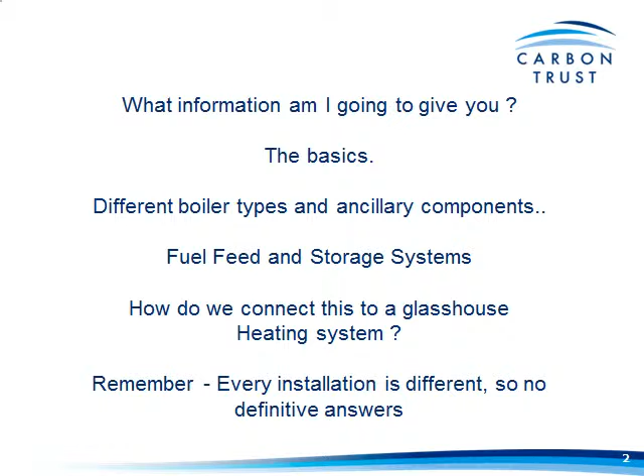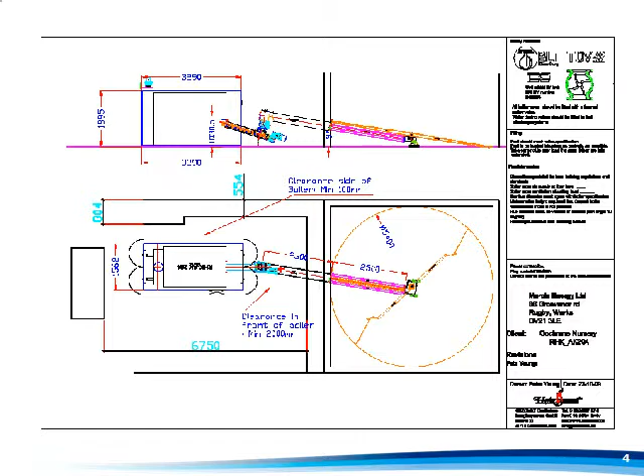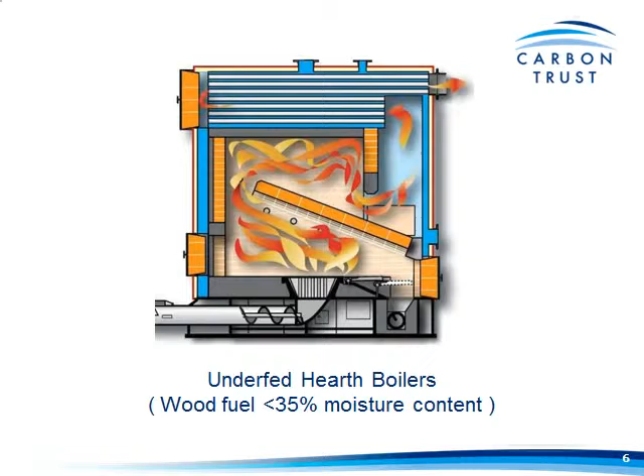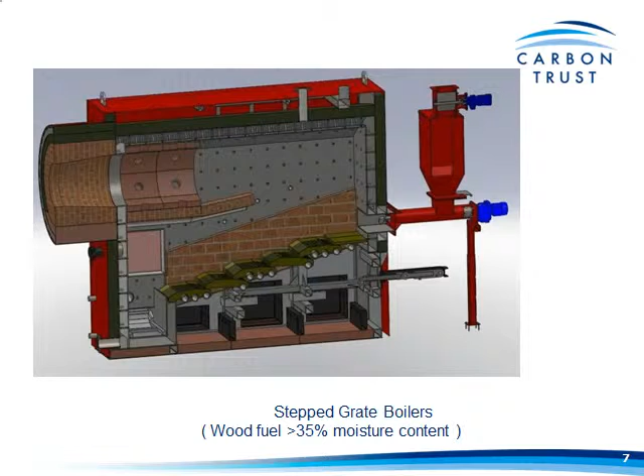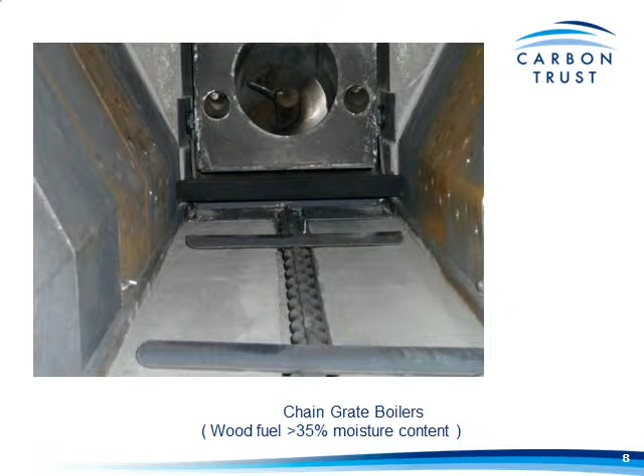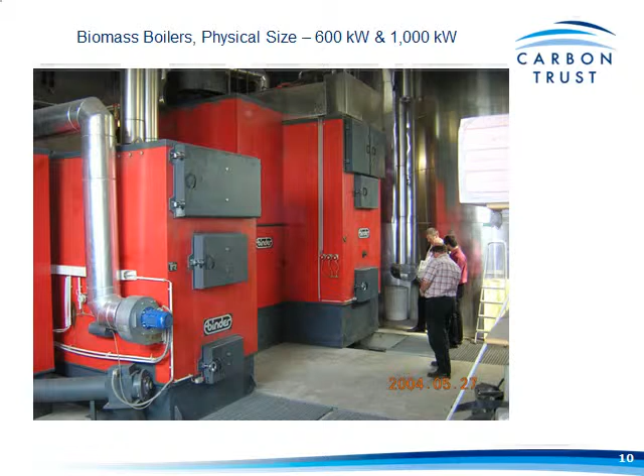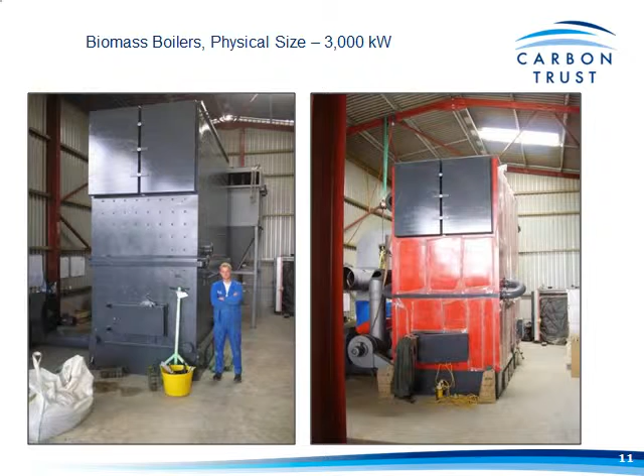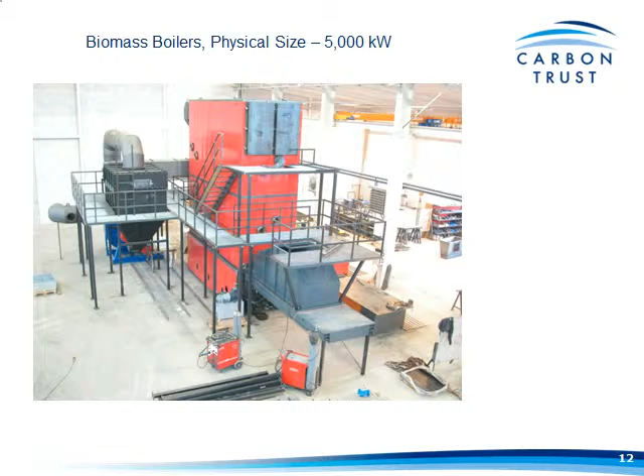We'll get back to the 600 kilowatt boiler, we can get it into probably what is a normal size boiler house. We're talking about a 6 megawatt boiler, you're talking about probably a new build plant room there.

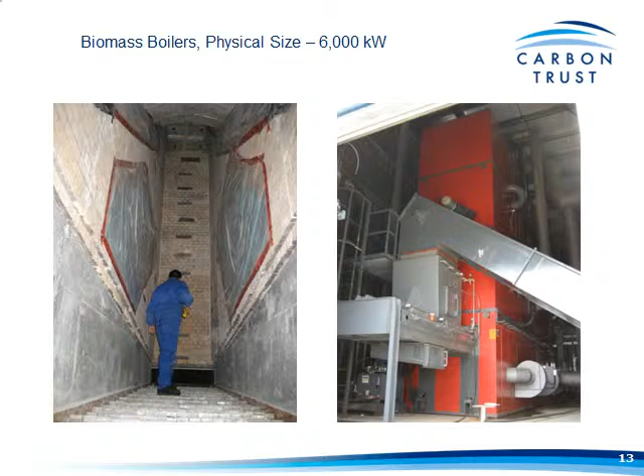Just going back to what I was discussing earlier about the heat exchangers. So generally, if I pop us back to that one very briefly, on that 5 megawatt boiler there, we have the combustion chamber at the bottom, and we have the heat exchanger body, the boiler tubes, in this top part here. So one on top of the other. Something like that will be delivered to site in 2 halves, put one on top of the other.

That's the alternative. Some manufacturers, what you'll get is your combustion chamber here, and your actual heat exchanger body is sat in front of it. Here we're looking at large scale plants, we're talking 3 megawatt and upwards, but again the actual floor space itself is much bigger on something like that.

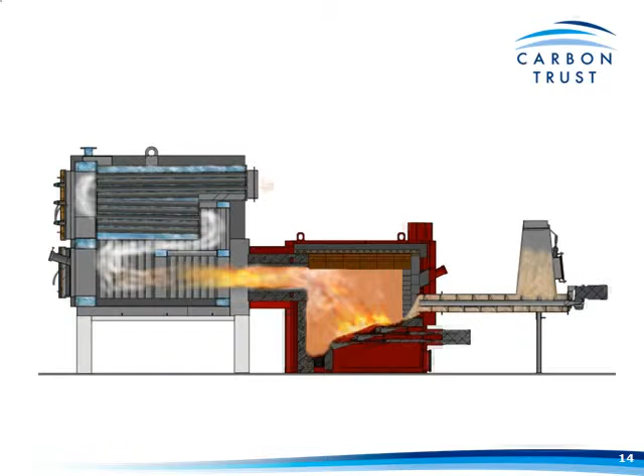Boiler selection has got to be based on fuel. We're looking at fuel first before we look at boiler choice.

The concept of a boiler that burns different fuels is largely a myth. We can possibly swap between the likes of wood chip and wood pellet, but you're recommissioning the boiler to do it. If you're looking for something that will burn wood and it'll burn straw, we're into very difficult territory indeed, without some major changes in between. So it's not a case of doing so many months of one fuel and swapping over. What you're looking at is a constant fuel supply all the way through.

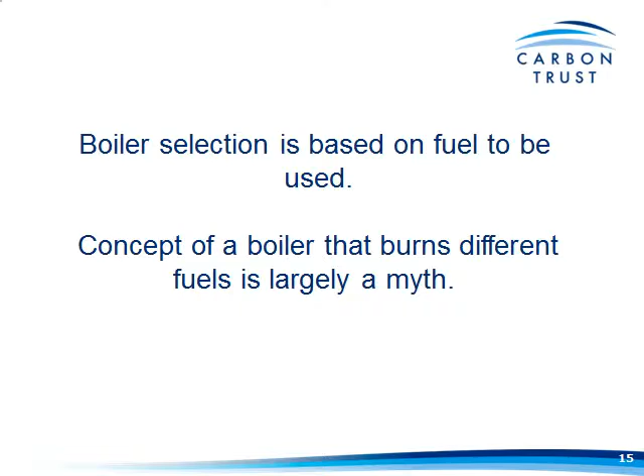Boiler features, the optional extras. What we're often asked is, how much maintenance is this going to take? How many hours a day is it going to take to look after this boiler? There's certain ancillaries on the boilers that are almost must-haves, and with those features on the boiler, it makes your maintenance an awful lot easier.

So just the basics of these, what I'm going to run through is flue gas cyclones, which take the fly ash out of the flue gas, automatic tube cleaning, automatic de-ashing, and automatic ignition. All of which are fairly hands-on procedures if you've not got them, so really going between the difference of what is daily maintenance to probably weekly maintenance.

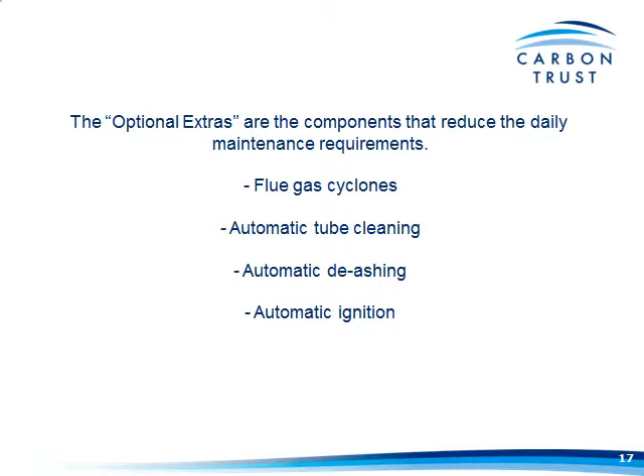Your flue gas cyclones - basically your flue gas is brought in through here, flue gas drops, and it is acting like a cyclone, spinning the flue gas. And what that's doing is it's then dropping the fly ash out of the gas and collecting it into a bucket at the bottom.

So these are similar to these units here. This is actually a school project where the flue gas is coming through. This is your cyclone body, and this is your ash collection bucket on the bottom.

We put a 500 kilowatt boiler in at Lanoyce Nurseries down in Cornwall. Now he's collecting half a bucket a day in that. But what we're actually seeing because of that, when it comes to end of the season and you're looking at glass cleaning, there's very little, if anything, on the glass house roofs or in the gutters or anything. That's taking out all that fine ash that without that unit on there would probably end up on the likes of your glass house roof or on the neighbour's windows or something like that. Not a vastly costly option, but something certainly worth having on the units.

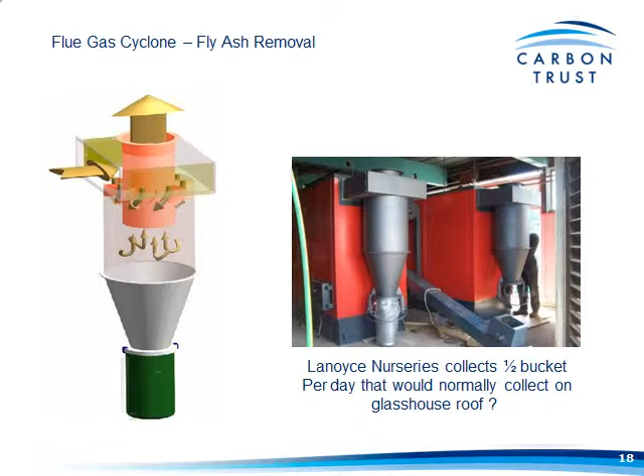Automatic tube cleaning. Obviously, with it being a solid fuel boiler, as the gases are running through the tubes, the soot's collecting on the inside of the tubes. So again, we need some sort of automatic cleaning system in there. Otherwise, what we're doing is we're opening the front door and manually cleaning the tubes out.

A couple of different types. Here we have an installation we did up in Wiltshire. It's for a district heating scheme.

This is air shock cleaning, run off a compressor. Each one of these units on the front is a jet. They're all timed, so individually they will go off and put a blast of high pressure air through the tubes, blowing the soot into the ash collection boxes at the back of the boiler. Very effective. The only thing I'd say is each one of those going off is almost like a shotgun going off.

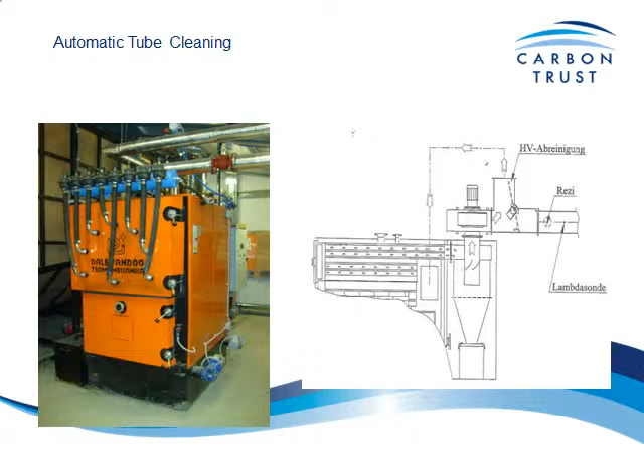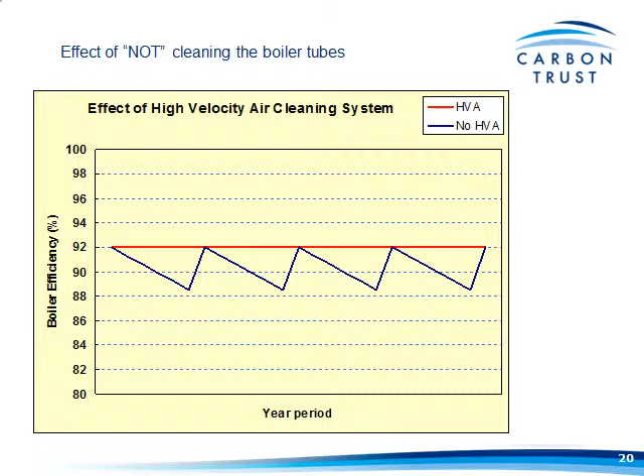In effect, what we're left with in here is potash. You can also, depending on how big your boiler is, put that on your garden.

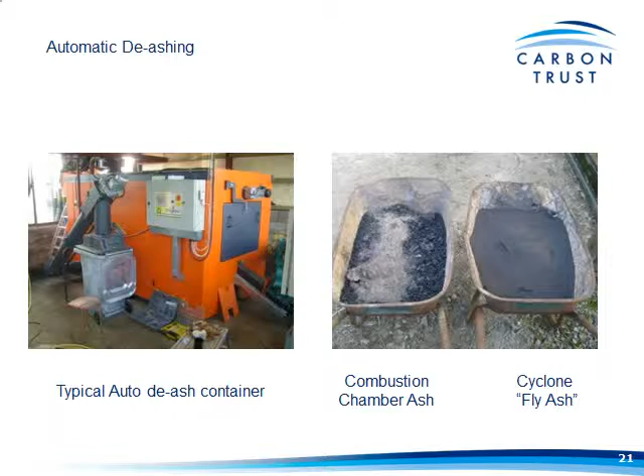Automatic ignition - generally these are heat guns, electric heat guns, and that's just heating the fuel up to a point where it will ignite. Again, if we've not got this, you're opening the boiler door, putting in fire lighters, and doing a manual light on the boiler. If the boiler's sized correctly, chances are you're probably only doing that at the beginning of the season, and it'll run all the way through, because we're trying to keep that boiler running - if it does shut down, it will smoulder for a period of time, and when your demand's back, it will fire up. But if it's left too long and it does go out, you're back onto a manual relight. So again, it's an option worth having.

There are some units where this can be an oil or gas burner that's actually fitted into the unit. I've seen units where they're sized to the capacity of the boiler - you lose some efficiency doing it, but it's sized to the capacity of the boiler, so you're actually putting yourself a backup burner in there. If there is a fuel issue, you can actually run that boiler on oil or gas. Not a cheap option, but it's there as backup if you need it.

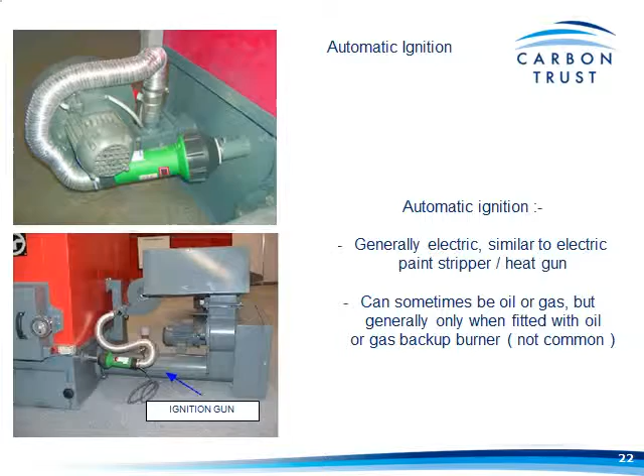Let's quickly touch on ceramic filters. There's a possible scenario within the renewable heat incentive that could focus on emissions.

So we've got to counteract this. What we're hearing is that it's probably largely focused on NOx emissions. With flue gas cyclones, they're not doing an awful lot for NOx, but we are taking out the fine particles.

Exhaust gas recirculation is where they actually bring exhaust gas back through the combustion chamber to control the combustion temperature. In doing that, it actually lowers your NOx emissions.

But we'd like to think that is going to be sufficient to meet the NOx regulations of RHI, if that's what's coming. If they don't, what we've got to look at are filtration units. A possible example of that is ceramic filter units, where we have ceramic tubes in housing behind the boiler. There is a cost to that, but until the RHI is known, it's a difficult one to predict. At the moment, when we're looking at costs, we've kind of got to allow a sum of money to cover that.

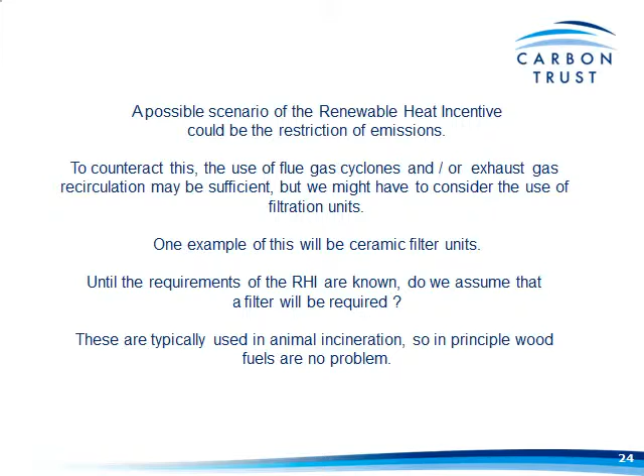Fuel storage options - that's what we're trying to achieve. When you get your wood chip delivered to site, ideally we want to be tipping straight into your fuel store. To build a hole in the ground can prove quite expensive. If your site's got a natural slope to it, you can possibly utilise that, or we'll possibly look at building some sort of ramp up to a fuel store, so you can deliver into it.

It may well be, on the quantities we're looking at, you're actually delivering your wood chip into a separate store anyway - just delivering it onto a barn floor, possibly using a front loading bucket to bring it to your main fuel store. So it's not really an issue if we're looking at those kind of quantities.

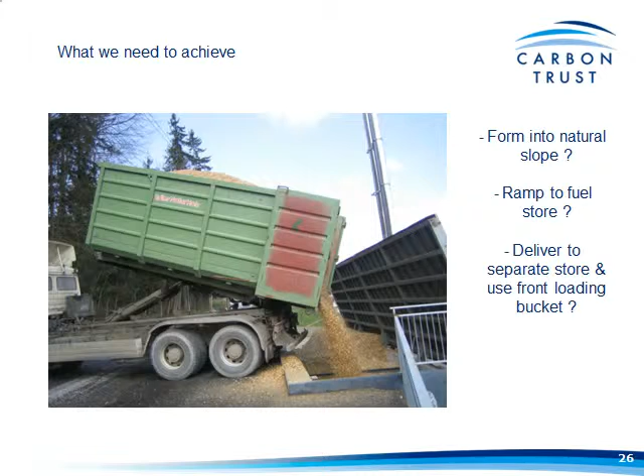Smaller boilers, if we're looking at boilers of probably up to 500 kilowatts, we can look at rotary agitators. Here we have a square bunker with a sweep arm in there. That arm sweeps around, bringing the fuel into this auger, which then passes into the boiler.

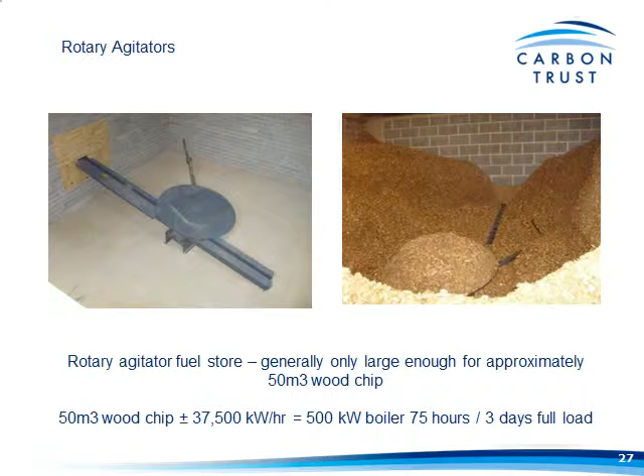Roundabout in those stores, you'll get roundabout 50 cubic meters of wood chip - 50 cubic meters, 37,500 kilowatt hours or thereabouts, depending on moisture content. So on your 500 kilowatt boiler, that'll give you 75 hours, around about 3 days at full load capacity with that boiler running flat out. So what I'm trying to get to is that kind of fuel store, you're really reaching your limit at around about 500 to 600 kilowatts - that is kind of your limit.

After that, we're really looking towards walking floors. Walking floors are basically a metal grate on the floor, controlled by a hydraulic ram. These grates will actually slide, pulling the fuel up the fuel store into what is an auger that runs across the back of the store. Now we can line these up side by side.

These grates can go 10, 11 metres long, probably at a maximum. What we can do is repeat that side by side, one on another, and with that you're delivering onto a flat floor.

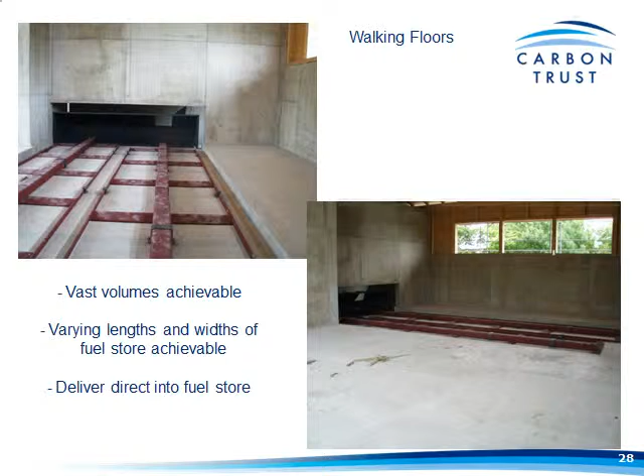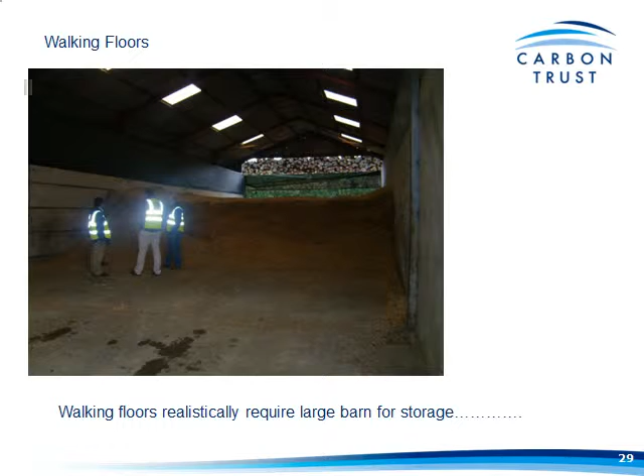So that's realistically what we're probably looking at - a barn with the walking floor built into the floor where the wood chip is piled on top. What we've got to consider is it's got to be high enough, because if you're coming in with large tippers, you need the height in there to be able to get it tipped on.

Some of these walking floors you can't drive on, some of them you can. Some of them, if you've got 4 inches of wood chip on top of the walking floor, you'll be able to drive a front loading bucket on there. Again, there's different units on the market - different manufacturers will offer different systems, so we should be a little bit careful about what these walking floors will actually handle.

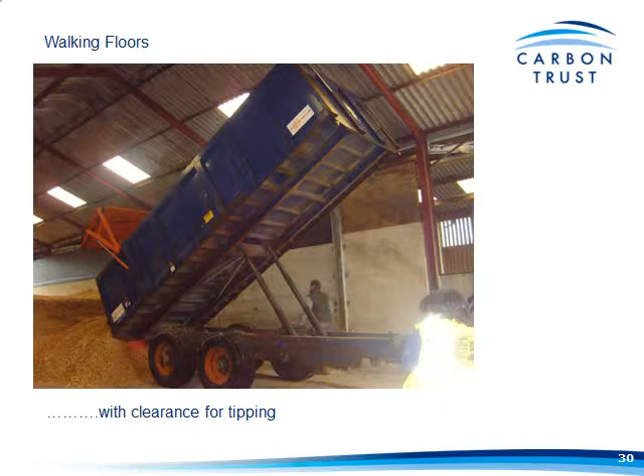Again, another option - I'm not going to go into the technicalities of it, but it is another option there based on your fuel choice.

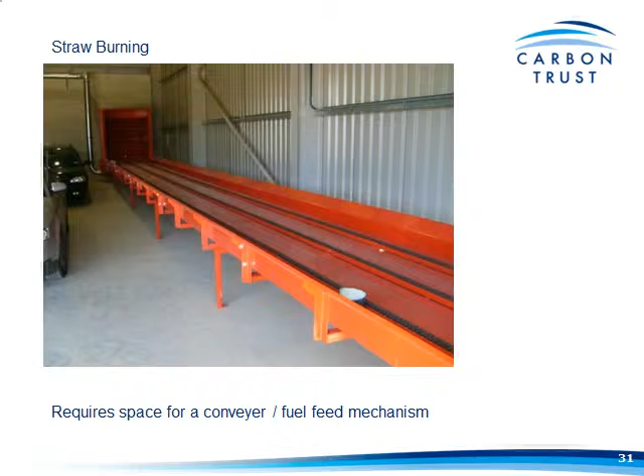Straw burning again - what we've got is this conveyor here running up, with an overhead crane unit taking the bales in. That one is actually chopping the bales rather than shredding them, chopping bales to then take the straw into the boiler with a hydraulic ram feed.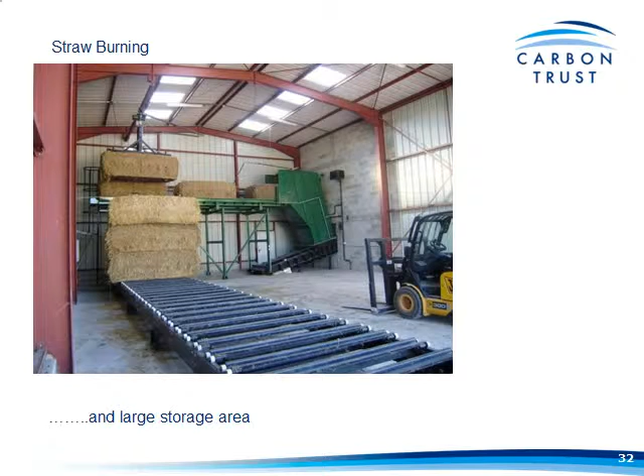But again, what we've got to look at is this vast area that you do need for fuel storage.

A few issues with straw burning: high sulfur contents, high chlorine contents. In the early days, the rule of thumb was your straw burning boiler will last 25 to 30% shorter time than your wood chip boiler would. These days they're starting to change the materials, and they're now very comparable to the likes of a biomass boiler, a wood chip or wood pellet boiler.

I guess we haven't got any actual data yet, it's so new there aren't any boilers that have got that sort of age on them. If we're looking at straw boilers, last week we looked at one, and that boiler is probably 4 years old, probably one of the older straw burning units in the UK. I think there's quite a bit of experience in incineration of waste to say that those steels do last, they burn some pretty noxious substances, so there is quite a history about that. I don't think there's any issue about the new steel in the boiler.

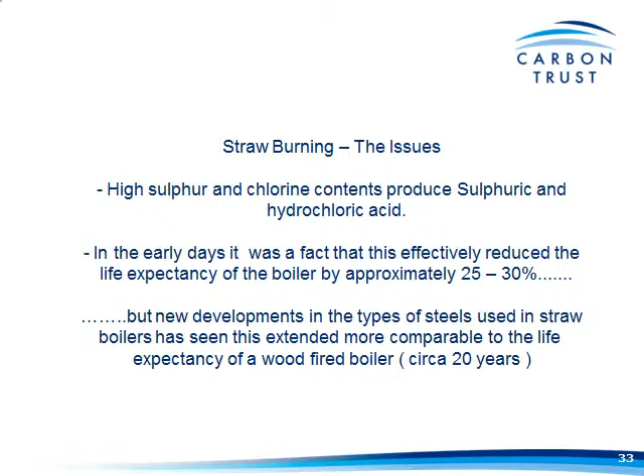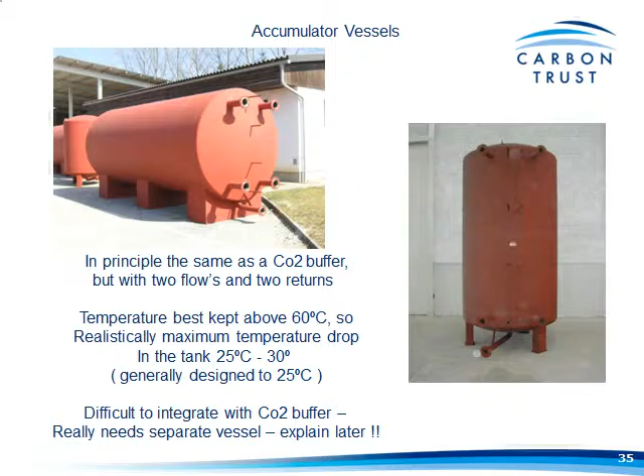Heat storage, Tim touched on this earlier. Your heat storage is a similar principle to your CO2 heat storage. The difference is that we're running these tanks with two flows, two returns on them, which I'll come back onto shortly. What we're looking at is trying to keep these temperatures above 60 degrees. Realistically what we're looking at is using 25 to 30 degrees out of that tank, so we're not dropping vast quantities like with CO2 heat storage, but we can link this in with your storage.

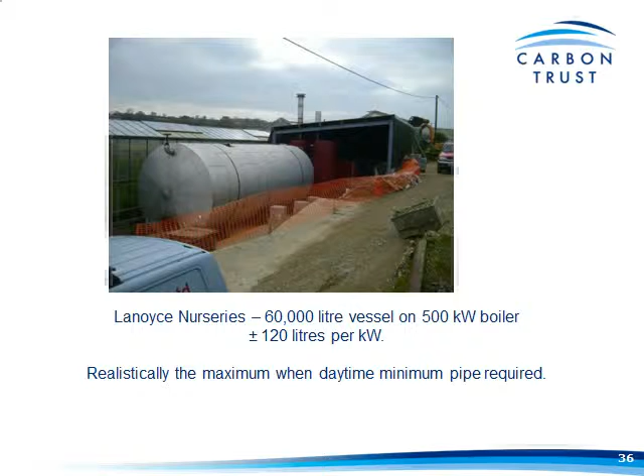Take the nurseries example again, this was a 500 kilowatt boiler. We put in a 60,000 litre heat storage vessel, so 120 litres per kilowatt in there. That's quite a vast storage for a boiler of that size, but the theory is it does work. That boiler basically fires at the beginning of the season, and runs flat out all the way through till the end of the season.

Connecting your biomass boiler to your glasshouse heating system - this has been the downfall of a lot of systems so far. I think when biomass started coming into the glasshouse industry there was a little bit of bad publicity around systems not working. This is why, because they're not connected to the heating systems properly.

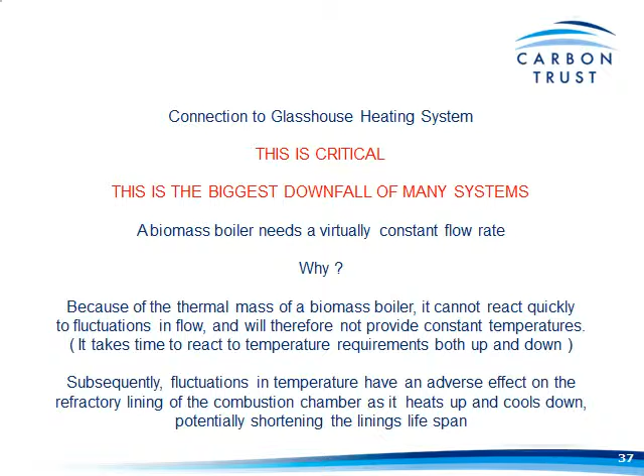What we're looking at very basically is we have a biomass boiler and we have our heat storage tank. A lot of biomass boilers early on were connected in as you would do with an oil or gas boiler, with pipes up, a variable flow rate through those, variable speed pumps, and mixing valves on there that vary your flow rate. Biomass boilers don't like that because it's solid fuel combustion - it wants a constant flow rate, it can't react as quickly to fluctuations.

So what we're trying to achieve here, to get the best out of it, we want to keep a constant flow. What we're actually doing is forming a loop - we're running into the heat storage tank, back out, keeping this loop separate from your glasshouse heating system. So whether you've got heat demand on the nursery or not, that boiler can run, storing heat in that tank. What we can then do is your glasshouse heating system will pull from that tank as and when it needs to.

So if you're not running CO2, if you've not got a CO2 buffer, we're sizing that tank to the full capacity of whatever your heat storage is. If you've got a CO2 buffer already, all we're actually doing is trying to make that just an intermediate vessel, because I'm trying to control it no lower than 60 degrees. Why am I trying to control it at 60? Because when I bring water back to the biomass boiler colder than 60, I'm reaching dew point at the back of my boiler, so I'm creating condensation there.